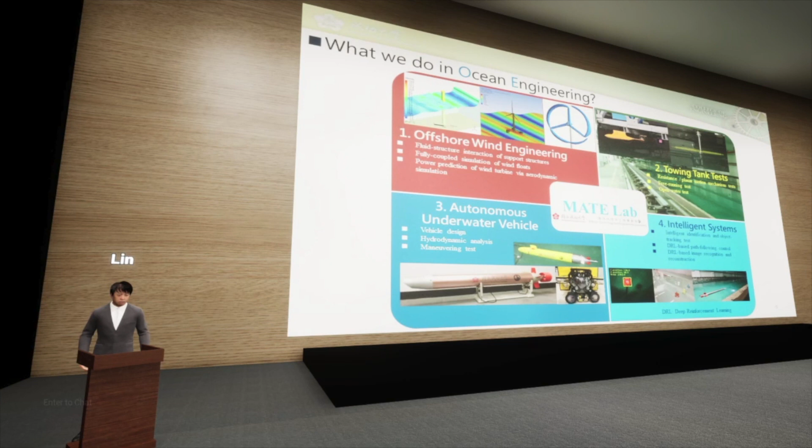Well, AUVs come in 2 main types, just as you see on this page: hovering and torpedo. Hovering types are designed to remain stationary in water, while torpedo types are built for swift navigation. On the other hand, ROVs rely on an umbilical cable for power and operation. These vehicles find applications in various industries such as oil and gas, oceanography research, and mine operation.

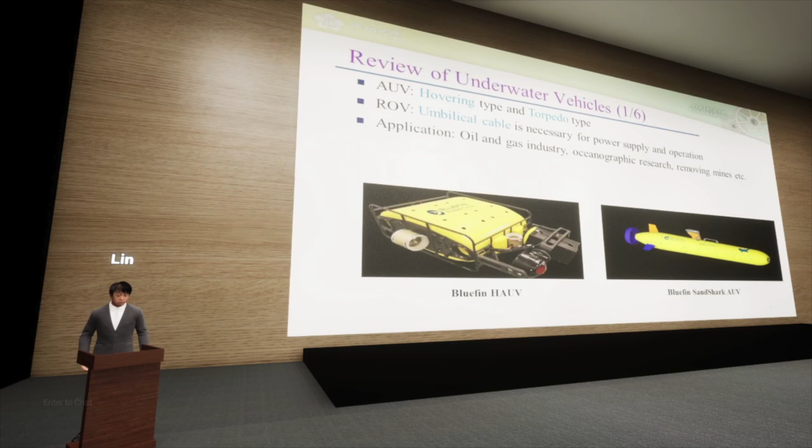In scientific research, underwater vehicles are equipped with sensors to conduct tasks such as monitoring water quality, studying aquatic organisms, and observing marine physics phenomena. Meanwhile, for underwater structure inspection purposes, these vehicles are utilized to inspect ship hull appendages as well as dams and bridges.

Deep sea exploration has been greatly advanced by the development of the Autonomous Benthic Explorer (ABE) by the U.S. Woods Hole Oceanographic Institution in 1995. The ABE utilized sonar positioning to navigate the deep sea and is capable of remaining on the ocean floor for extended periods, significantly enhancing our ability to study the depths of the sea.

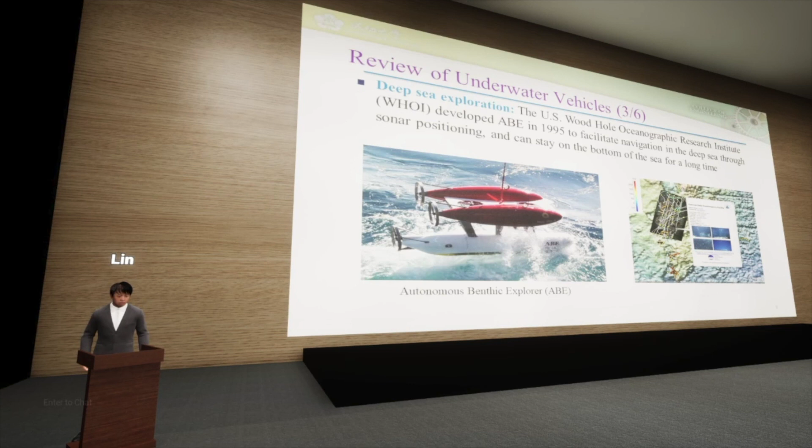In disaster investigations, the AUV ABYSS 6000 played a crucial role in examining the crash site of Air France Flight 447. Utilizing side scan sonar technology, ABYSS located significant wreckage, including the wings, engines, and the landing gear. Additionally, working in tandem with an American ROV, the flight recorder of Air France 447 was successfully recovered during the initial dive, highlighting the effectiveness of autonomous underwater vehicles in disaster recovery efforts.

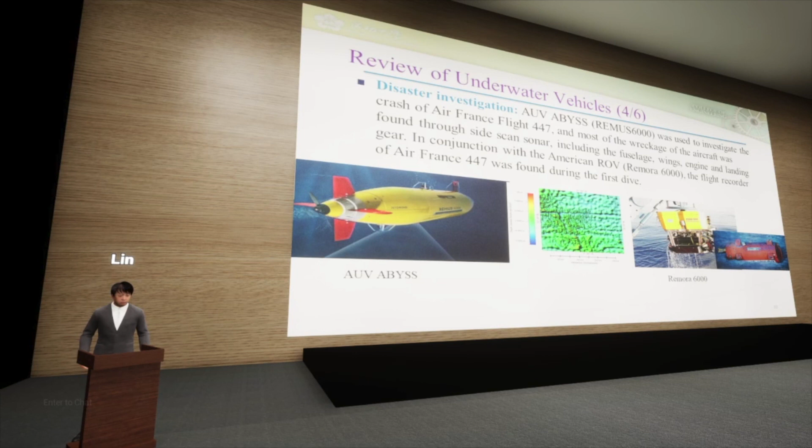In industry applications, AUVs are employed for various tasks, such as surveying underwater power cables, locating underwater mineral deposits, and mapping the seabed. For example, the C-Surveyor VI is utilized for these purposes. Furthermore, a new survey mode has emerged where Geodetic Offshore Services Limited utilizes twin-body AUVs to conduct surveys on existing or new underwater pipelines in the West African region.

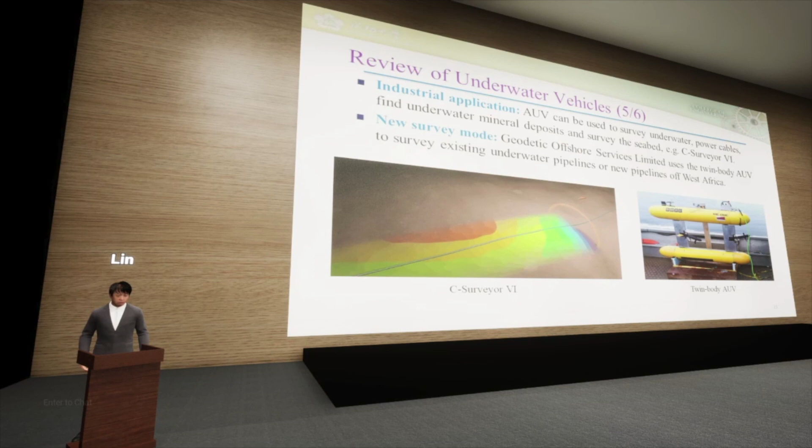In submarine simulation, AUVs find application in the fabrication of semi-autonomous free-running models, such as the BB2. These models enable researchers to simulate and study the behavior of submarines in various underwater conditions, aiding in the development and testing of submarine technologies and strategy.

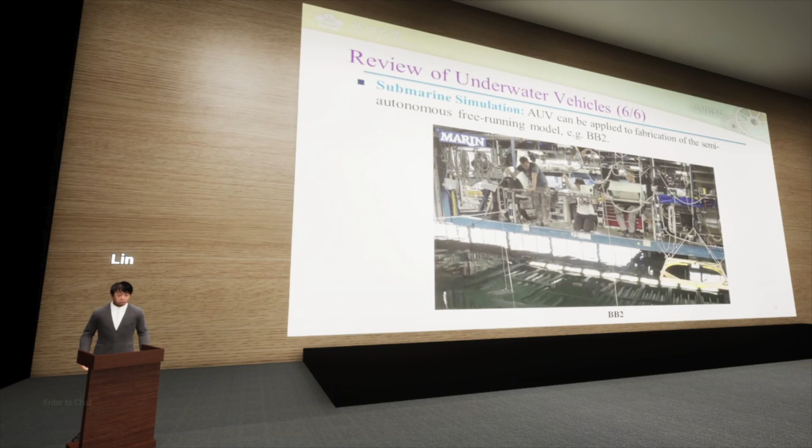Okay. For the design of AUV, accurately estimating the hydrodynamic coefficients and the resistance will have a significant effect on their maneuvering performance. Therefore, an innovative and efficient experimental procedure is established to analyze the maneuvering derivatives of a half-scale submarine body, SUBOFF,

in the horizontal plane for 4 different types, including bare hull with sail, bare hull with rudders, and bare hull with appendages, by conducting the so-called planar motion mechanism (PMM) experiments in our towing tank, 176 meters times 8 meters times 4 meters, of NCKU.

The PMM experiments comprise both static tasks, for example, the oblique towing test, and the dynamic task. And it's worth mentioning that the maneuvering derivatives derived from the PMM test are in good agreement with the results published by the DTRC.

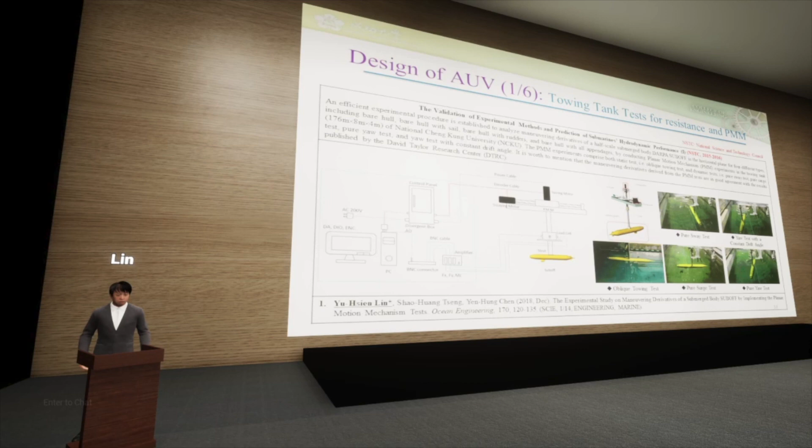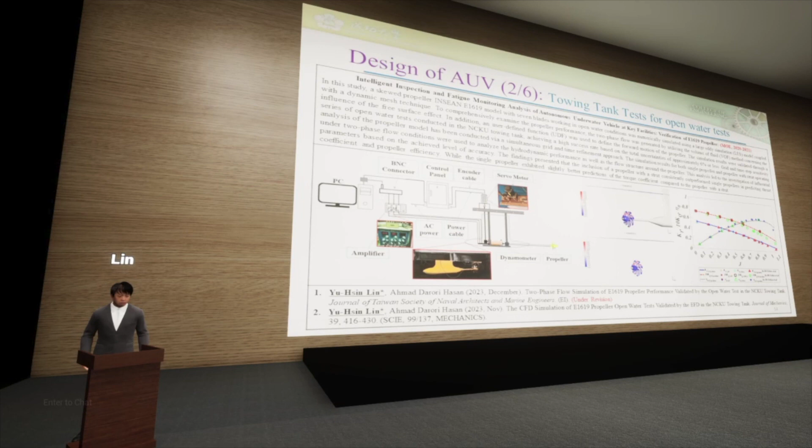Well, after completing the aforementioned constrained model tests, free-running tests of a vehicle will be conducted. The key capability of this research is to develop the submarine free-running model, SFRM, that can be used to investigate the extreme maneuvers for comparing safe operation envelopes, SOE.

The free-running submarine model provides the ability to evaluate scenarios and environments that reflect the operational requirements of the submarine under consideration, to determine performance characteristics, undertake design trade-offs, identify constraints, and compare alternative designs. It will be applicable to the in-service and design stages of all submarine programs and provide advice and guidance to the Navy regarding key capabilities of submarine maneuvering and control.

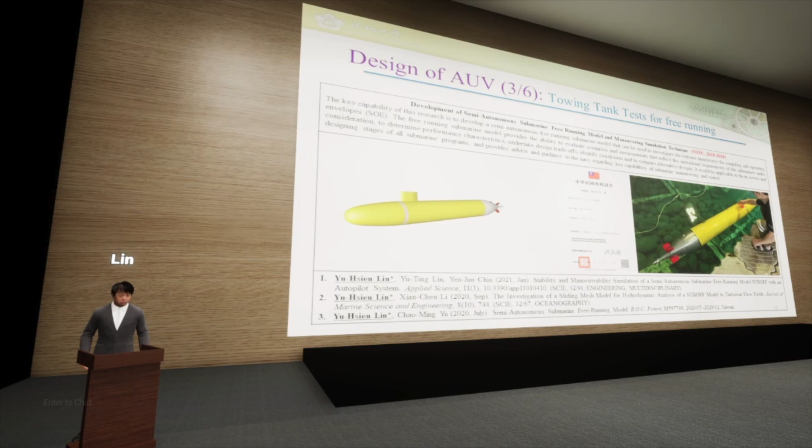Well, let's talk about the design of our AUV. Sorry about it, it's a little bit late.

Well, okay. The AUV can be considered as a system that integrates various sensors, while also needing to examine whether its functionality meets mission requirements. As we know, the accuracy of navigation and localization for AUV in underwater environments is particularly challenging due to the rapid attenuation of global positioning systems and radio frequency signals. Therefore, this research aims to provide a new alternative solution of AUV for positioning and exploration of unknown underwater environments by using vision-based sensors to develop a two-dimensional map and three-dimensional objects.

After function customization, our AUV can be adopted in the fields of entertainment, aquaculture, inspection of ship hulls and auxiliary facilities, underwater security of ports, mine countermeasures, unexplored oceans, and applications in marine science, marine resource protection, and underwater rescue.

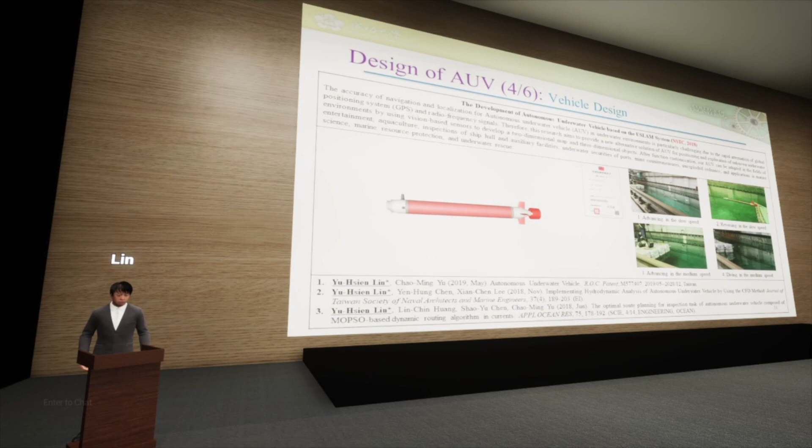Well, we have already known that hydrodynamic analysis dominates the maneuvering performance of the AUV. But what if we don't have reliable experimental facilities like the PMM? The alternative is to establish a dynamic mesh model based on the horizontal planar motion mechanism, HPMM, test and provide a comprehensive database of hydrodynamic coefficients for the AUV numerically and experimentally. A series of HPMM tests in the NCKU towing tank validated the simulation results.

The dynamic mesh model can be performed on oscillation motions of the yaw mode, the pitch mode, and the roll mode by adding a series of comprehensive user-defined functions. Since most numerical results are in reasonably good agreement with the experimental data, applying the proposed dynamic mesh model in the simulation of an HPMM test in a towing tank can be demonstrated.

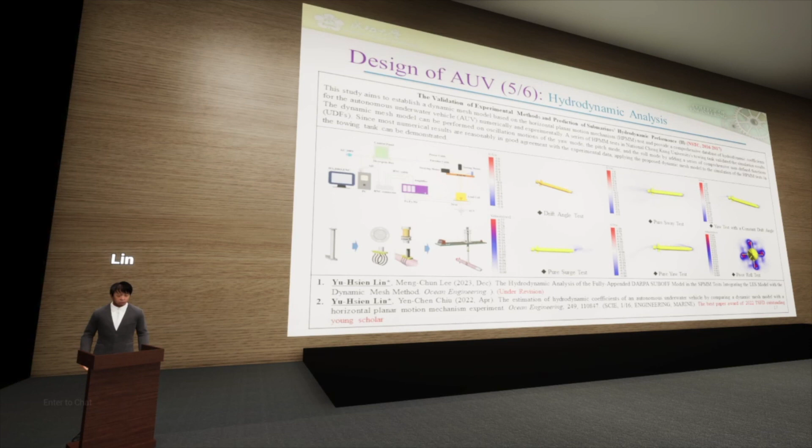Let's talk about the maneuvering test of our AUV. Well, in the following maneuvering test, we developed an experimental-based adaptive fuzzy controller for the diving control system, so-called DCS, of the autonomous underwater vehicle to ensure high stability and rapid integration.

The DCS we developed is designed with a depth sensor and an attitude and heading reference system, AHRS, to sense the attitude vector and the current depth of the AUV in real time as the control inputs of the attitude closed loop and calculate yaw and pitch controls of the AUV. Consequently, the proposed adaptive fuzzy control DCS is a model-free design that resolves the problem of depth keeping and attitude stability control of the AUV with unknown hydrodynamic coefficients, rudder dynamics, and time-varying external forces.

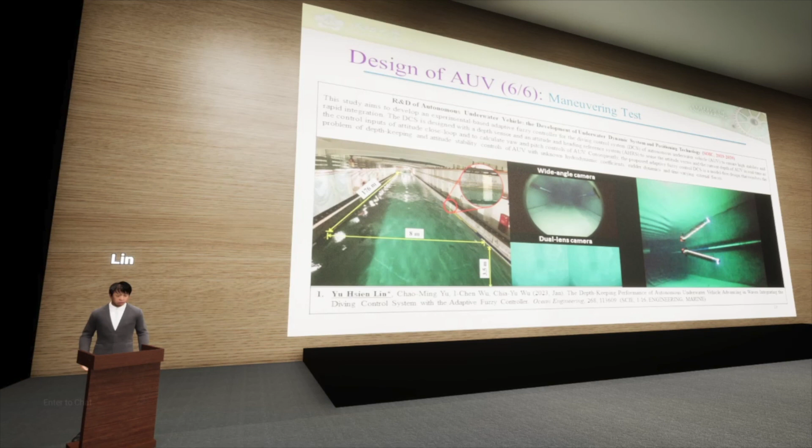And then I will talk about IBVS control. The IBVS control is an image-based visual servoing control. The IBVS technique establishes a closed-loop control system within a 2D image space. It achieves this by extracting features from the visual information of the observed object, computing the error relative to the desired features, and formulating a control law based on this error.

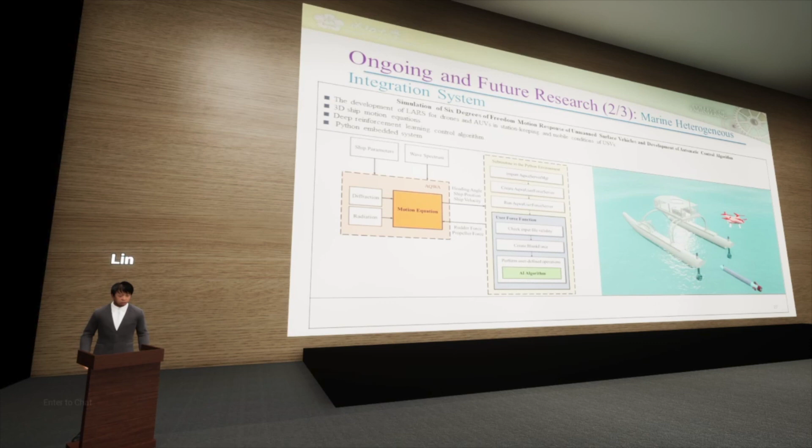Finally, let's talk about the marine digital twin system. Originally, you are supposed to see the training procedure of this marine digital twin system, but I think everything stops.

The integration of a marine digital twin system with AUV technology presents a groundbreaking approach to enhancing docking procedures. This kind of technology is very important for AUV because when the AUV enters the dock device, it usually faces a dangerous situation. That's the motivation of this technology.

By employing advanced digital twin models of marine environments, coupled with real-time data from AUV, docking maneuvers can be optimized for efficiency and safety. The synergy enables precise navigation and alignment during docking, mitigating risk and ensuring seamless operations in challenging maritime conditions.